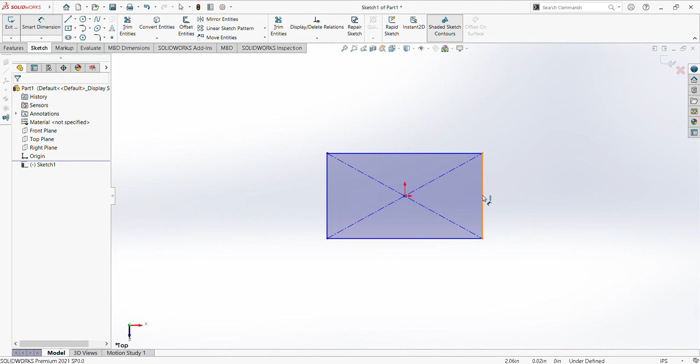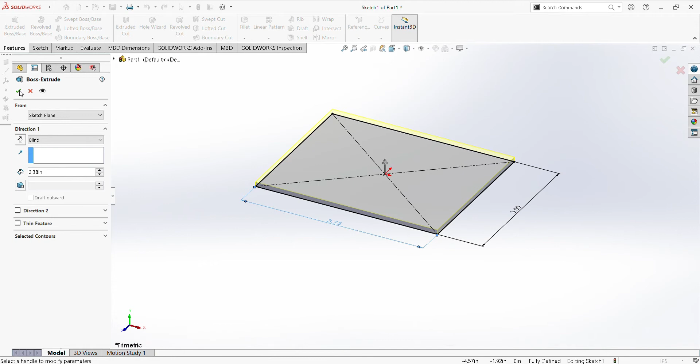We will first type in this side 3, and then the other one we will type here 3.75. Next is features, then extrude base this part. The thickness is 0.38. Then use fillet command, with the radius based on the given as 0.50.

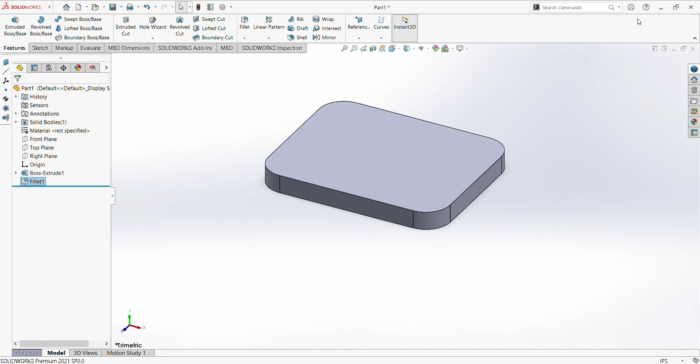Type it in here and then select this edge. Next, in order for this command to be applied in all corners, we will click this one. Next is to click this area, select sketch, and then facing it like this.

Then having this fillet area and pointing it here, this would be our reference for all the circles. So we're just going to draw circles to all these specific points.

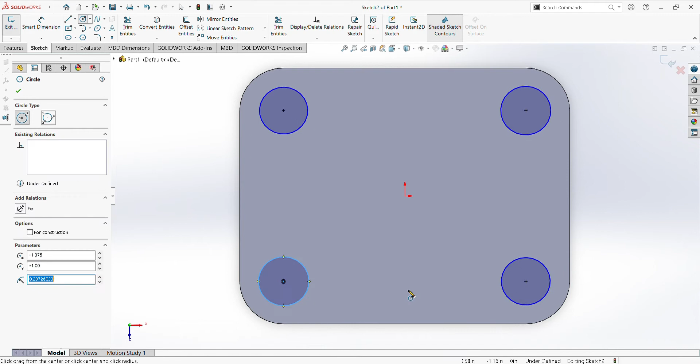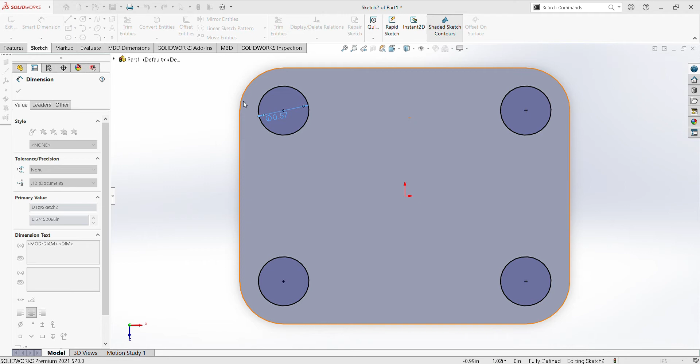Then, using smart dimension, we will type 0.38. Then, change this to isometric view. Next is extrude, select this through all. Click check.

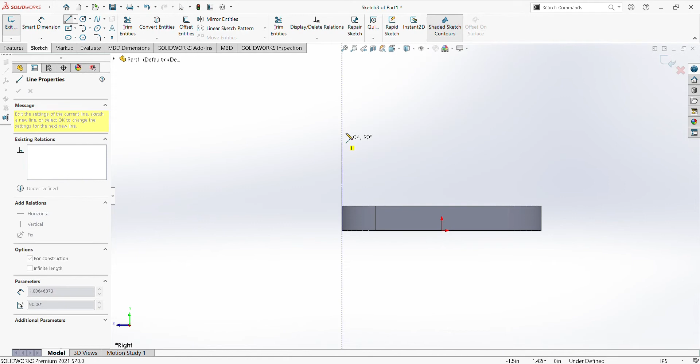And then moving on, we will select right plane. We will draw a line from this side and having this line from this direction. Its smart dimension is 2.66 and the angle for this is 120 degrees.

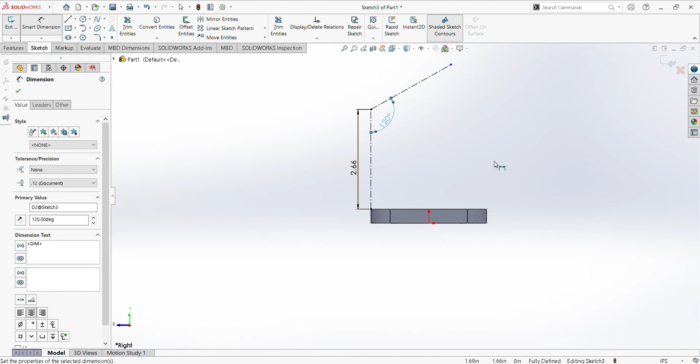We will now add a plane. Click the right plane, and then click this line for us to have this. Then clicking this plane, go to sketch.

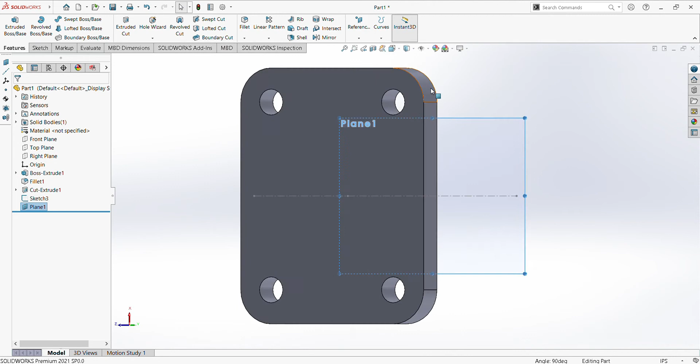Having this specific view, we'll use center rectangle for this part. Click smart dimension and modify it with 2.38. Then the other side would be 1.88.

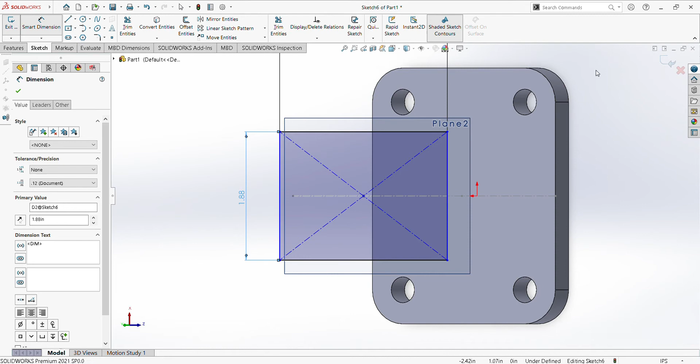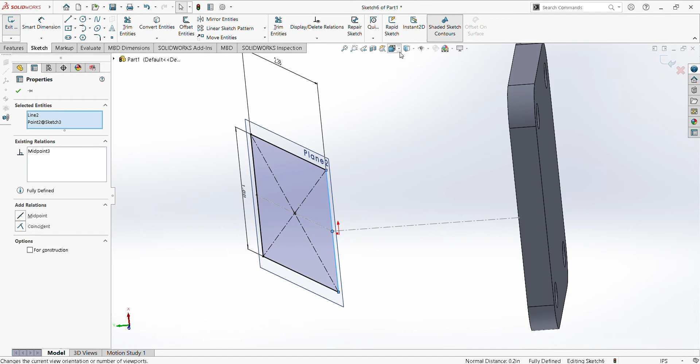Next is to add relation to this point, to this line, and then select midpoint. Next is proceed with isometric view. We will click features, then extruded base, and modify the thickness with 0.31.

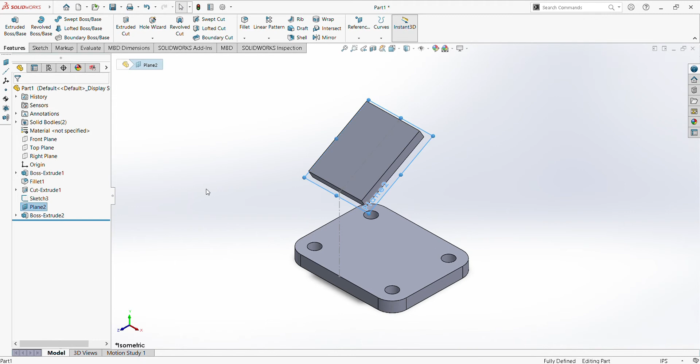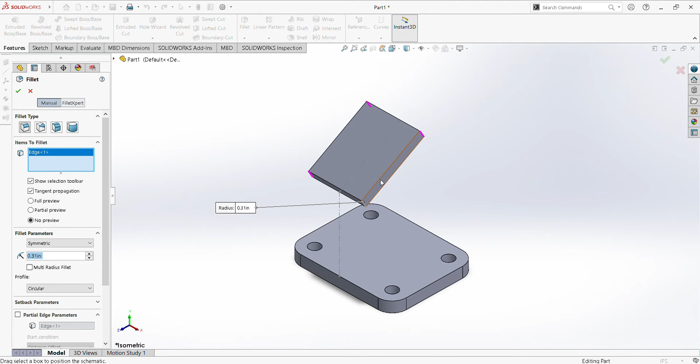We will now hide first this part. Next is fillet command with a radius of 0.31, and then select the edges and then click this again and then check.

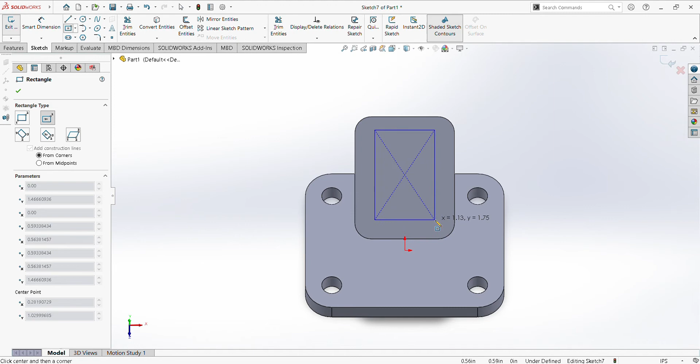We will have this view. We will draw circles. First is to use center rectangle. Modify, click smart dimension, set this side to 1.26 and the other is 1.74.

This will be a reference to draw all four circles to each side. Then select this specific circle, then add relations, and that is selecting equal. The diameter for this is 0.34, and we will modify it by smart dimension.

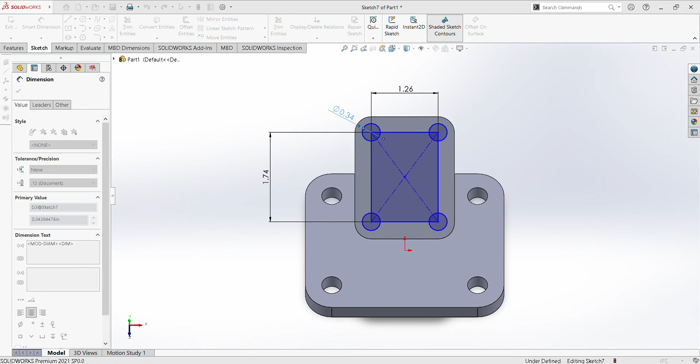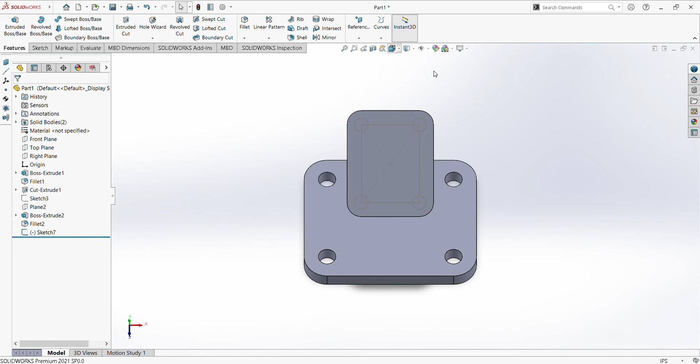Smart dimension again, click this point, then modify the distance of this point to this line, and then type it to 1.19. Select extrude cut, click the circle, and type in here 0.41, or just 0.31.

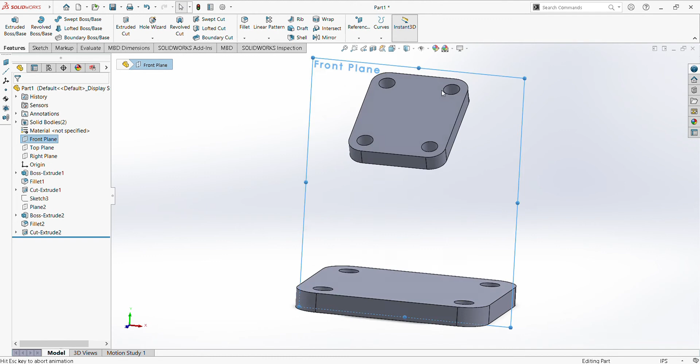Next is to select front plane, then sketch, draw a line from here, then add relations to this point, and this one we will select pierce, doing the same thing in this area, just like this.

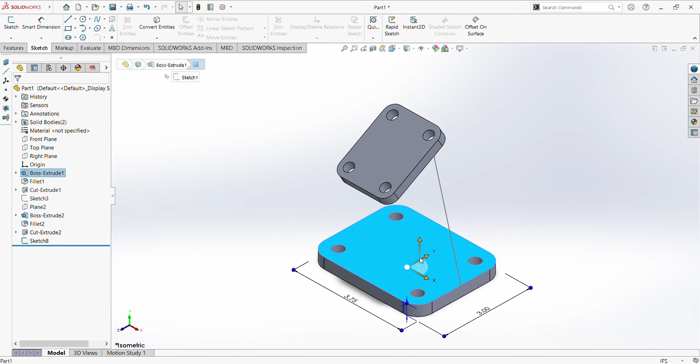Then we will change the figure into this view. Selecting the corner rectangle, we will draw a rectangle from this point. Then select smart dimension, modifying the side to 0.31, then this distance points, type 1.5.

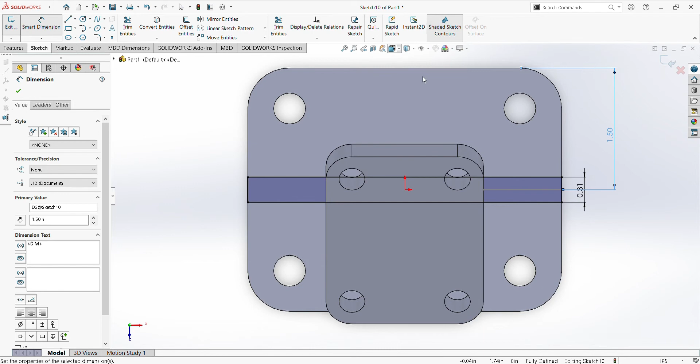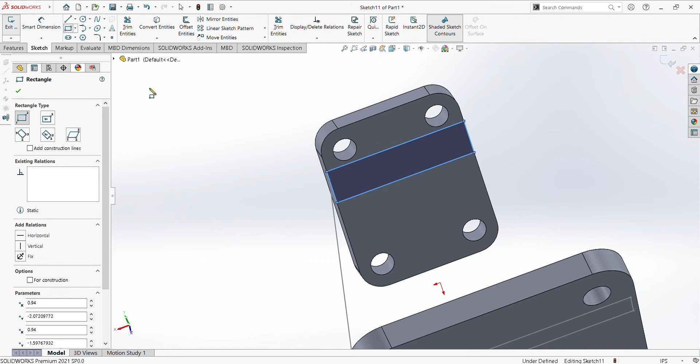Next is in this area. Select sketch, use corner rectangle, draw one here, select smart dimension, type 0.31, then we'll add relation to these points.

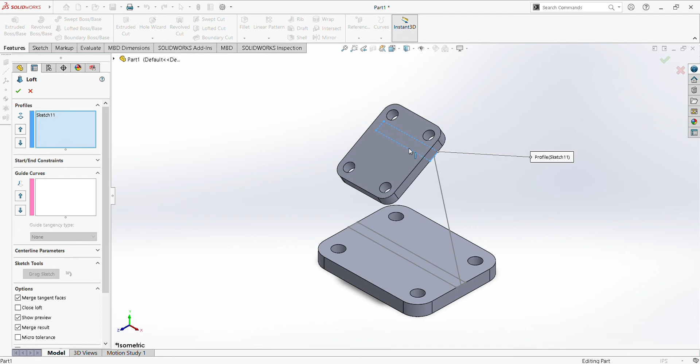Having again the isometric view, we will use this lofted base, the selected part, and also this. For this to be accurate, we will just change this and the guide curves, click this one.

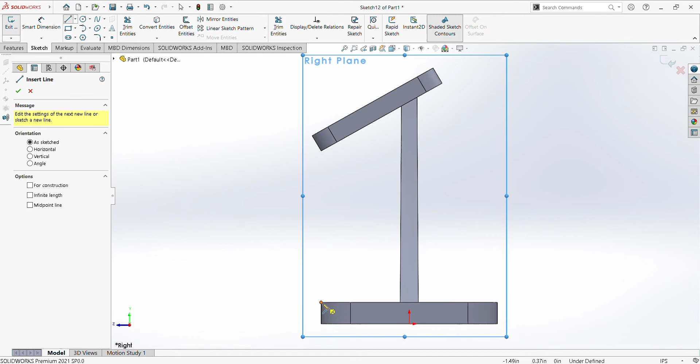Next is select right plane and then sketch from this. We will draw a line from here, then to here. Then click this rib command, change the thickness to 0.31, then enter.

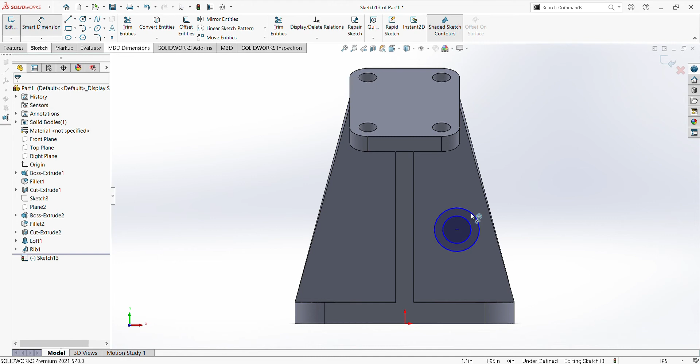Selecting also both sides, moving on. We will have this view and draw two circles. And use smart dimension, modifying this one to 0.75, then the other one is 0.50.

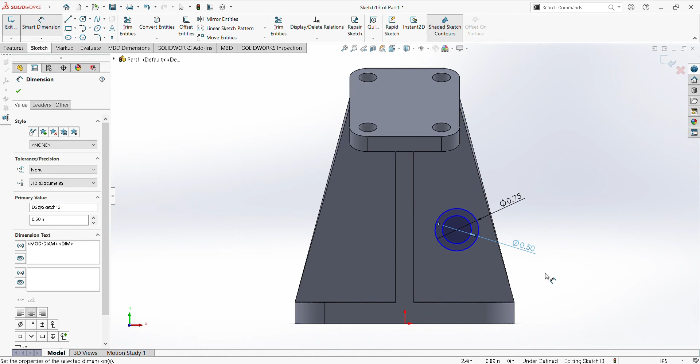Also modify its distance for this part by 1.38. And then this part would be 0.50.

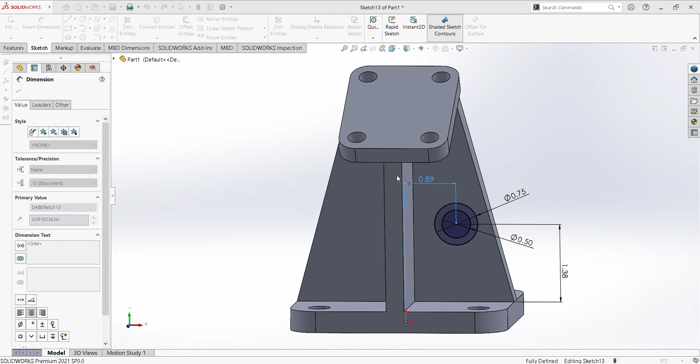Then select feature, then extrude commands. Selecting this part as direction 1, type in here 0.59 inches, while in direction 2, type 0.79.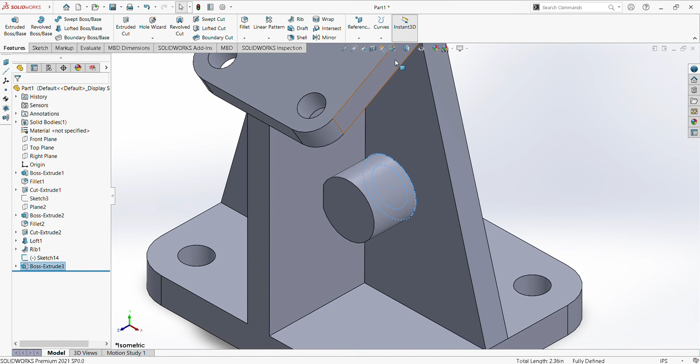Then go to sketch, select extruded cut, then select this part, and then change this to through all, both, then click this check.

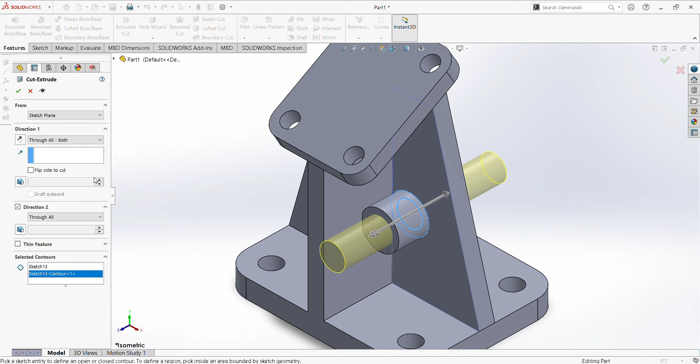With this view, click sketch, select corner rectangle, draw one in this area, go with smart dimension, type for this side of 2.26.

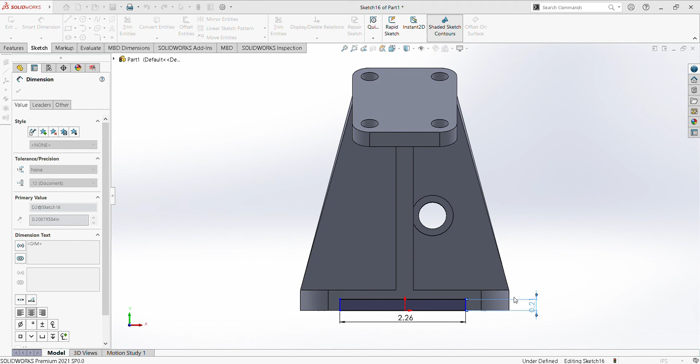And the other is 0.06. We will then add relations or fix this.

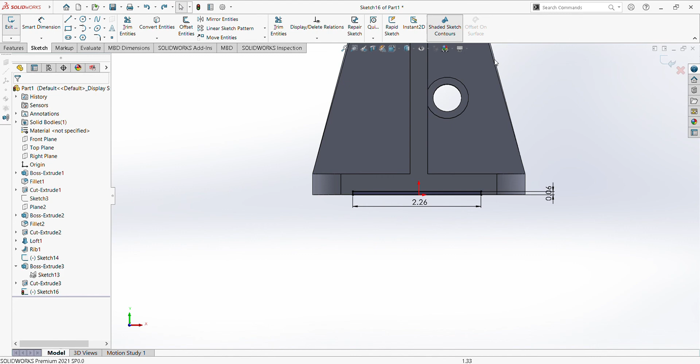We next click extruded cut and change this to through all.

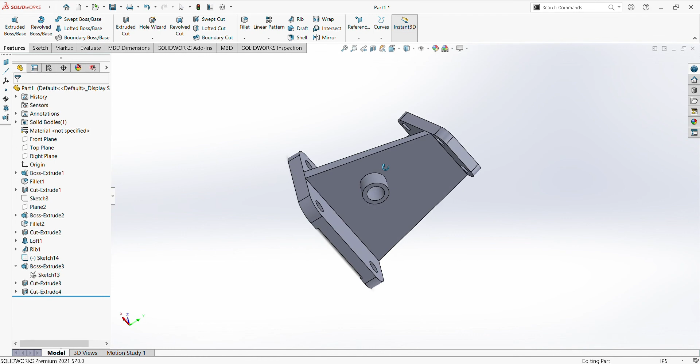So this will be our final output. That would be all, and thank you.